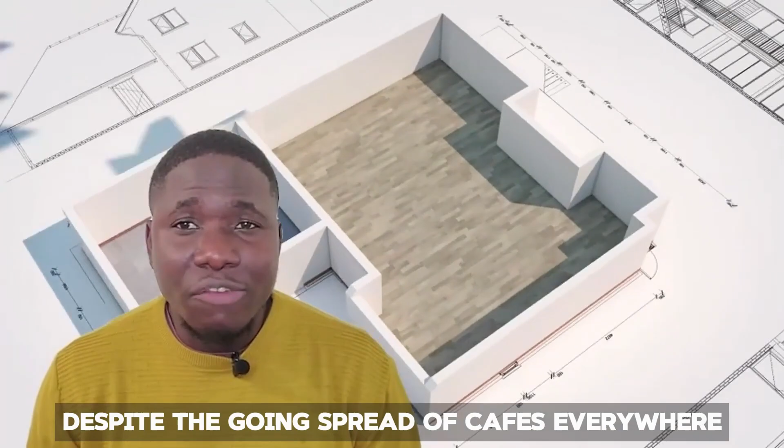This number includes both small independent cafes and large chains like Starbucks, with over 34,000 locations in 84 countries as of 2023. Despite the growing spread of cafes everywhere, designing and building one is probably one of the most mentally challenging endeavors anyone can undertake today.

In this video, I'll be uncovering the secrets of a hidden sweet cafe gem in Chiang Mai, Thailand, called Mitbury the Public House. From our findings, this project was envisioned to help customers enjoy the natural surroundings as they consume their light meals and drinks. But what many people don't know are the special characteristics of this building that make it a place you want to be. This isn't just a cafe, it's a story of innovation, preservation, and the romance between architecture and nature.

Located between the Mae Rim-Samoeng Road and the Mae Sa River, this project started out as a vision to create a sanctuary where nature reigns supreme and architecture serves as its humble companion. When WOS Architects Estudio first stepped onto this site, they were greeted by a low-lying valley, a canvas of natural beauty, untouched and pure. Their mission was clear but daunting.

Their mission was to craft a space that would invite visitors and customers to connect deeply with nature without disturbing its natural balance. Just hold on a sec. Does this mean that most buildings can be erected without destroying already existing nature? This project will answer that question in a jiffy.

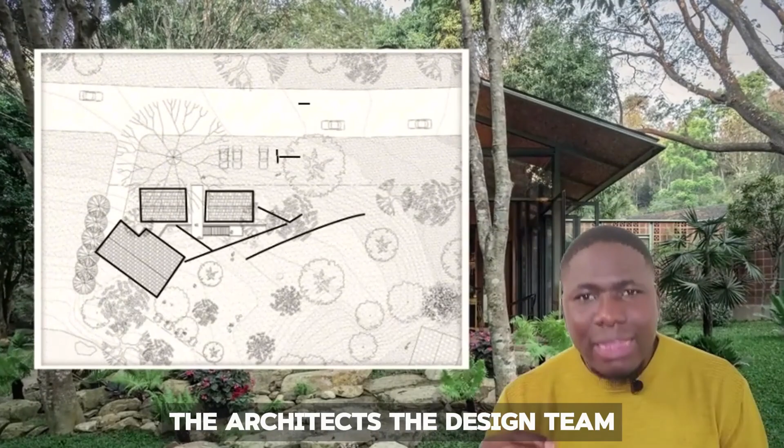As if that was not enough, the design team did something else on this project. Draw closer, I want to tell you exactly what they did next: the positioning of the buildings in this project. The architects decided to place the structure near the roadside embankment.

But there's a twist here. This wasn't just any placement. It was strategic, leaving enough gaps to nurture the already existing trees. From the road, a bridge or a walkover beckons, guiding you towards an unknown destination, and making you wonder what truly lies ahead.

When you walk on this bridge, and at the end of it, there is a revelation: a long staircase that descends into a hidden garden. This isn't just any garden. It's a secret world, a grand hall of nature surrounded by streams, boulders, and towering trees.

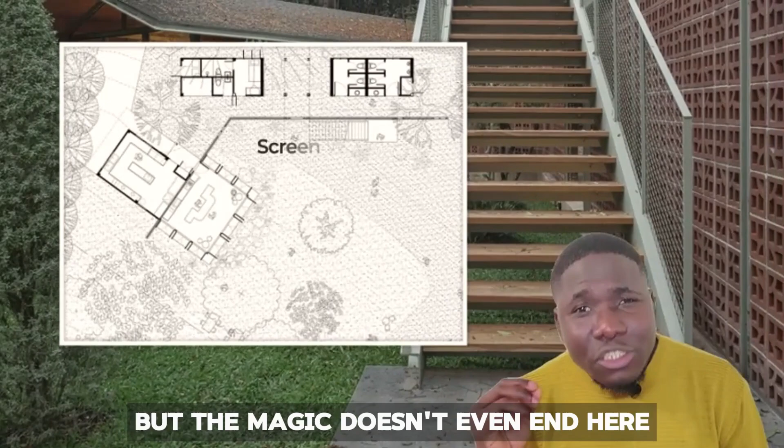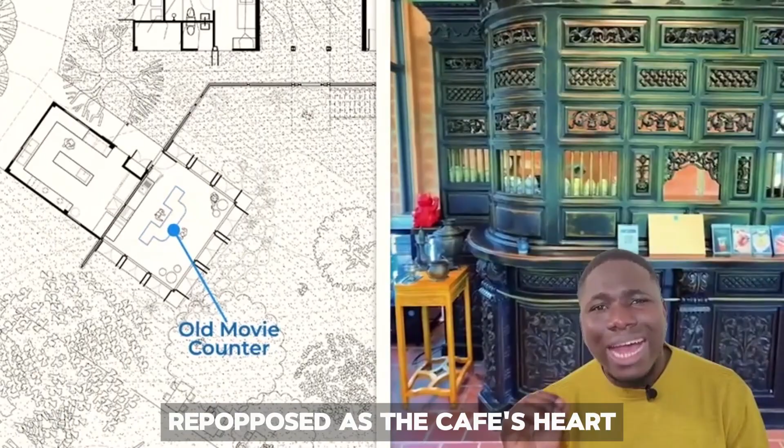But the magic doesn't even end here. The screen wall conceals more than just functional spaces. Integrated within are antique treasures, archways, windows, even an old movie ticket counter repurposed as the cafe's heart. It's a bridge between eras, and as a matter of fact, a conversation between the past and the present.

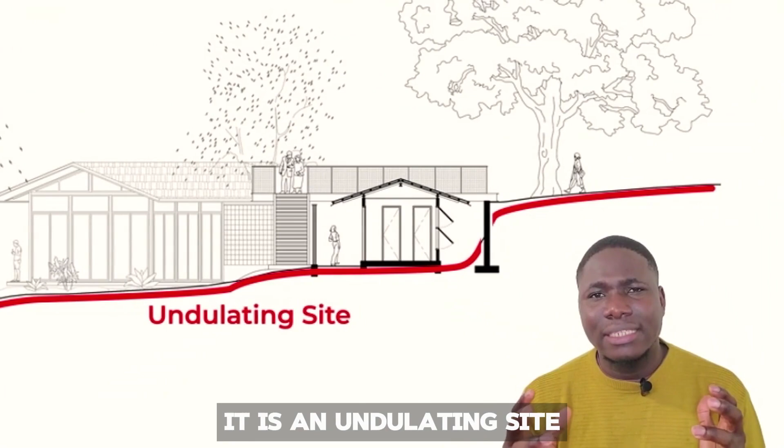The floor plan design. Now let's go over how this project was planned, looking at the information at our disposal. What do you easily notice about the location of this cafe? Contrary to what you might think, it is an undulating site with a retaining wall just at the end of the roadway. Typically, retaining walls are used for holding and retaining the soil from the road, to prevent things like soil erosion.

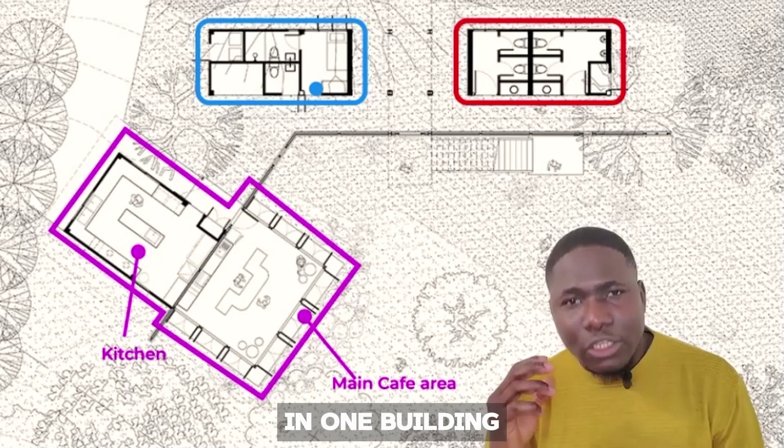Three single-story buildings form the core of Mitbury: the main cafe area and kitchen in one building, the storage and staff quarters in another building, and the restrooms in the last building. Each of them has a gently pitched gable roof for easy and gradual rainwater fall-off.

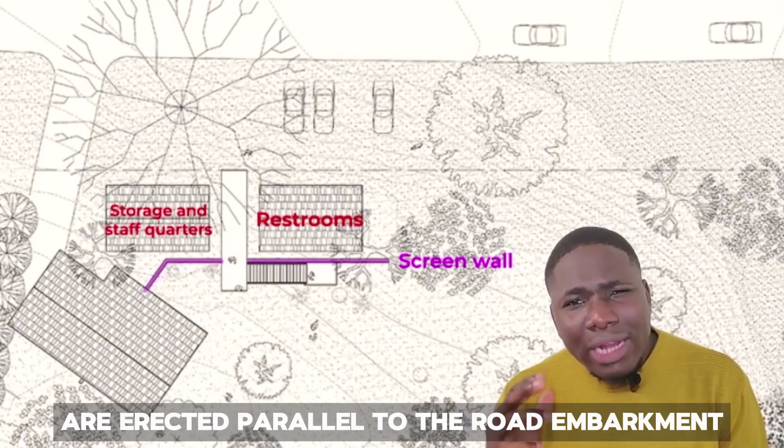Now I'm going to show you something even nicer. The storage and staff quarters, the washroom, and the screen wall are erected parallel to the road embankment. The walkway that leads to the stairs flows from the roadway and is cantilevered at the top of the screen wall at 90 degrees.

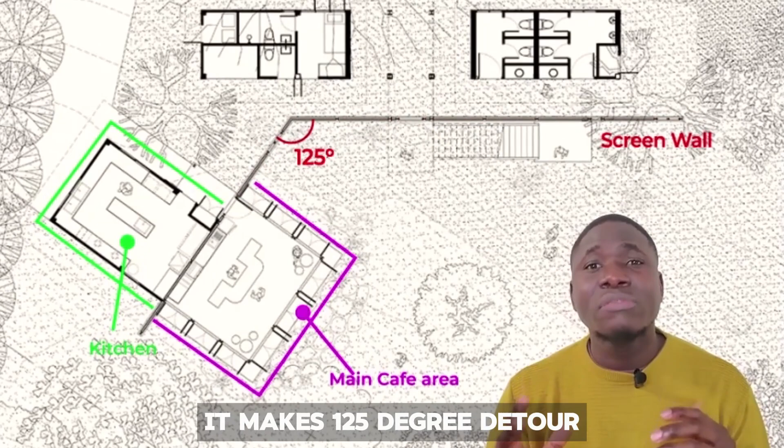Another thing to observe here is that as the screen wall approaches the kitchen and service area, it makes a 125-degree detour, as if taking you to a new destination, which is the main cafe area where you go to enjoy yourself.

Before I go on, I want to reveal something you haven't noticed yet. I think the designers would deem it necessary that you know, and I would never hide it from you. Now, look critically.

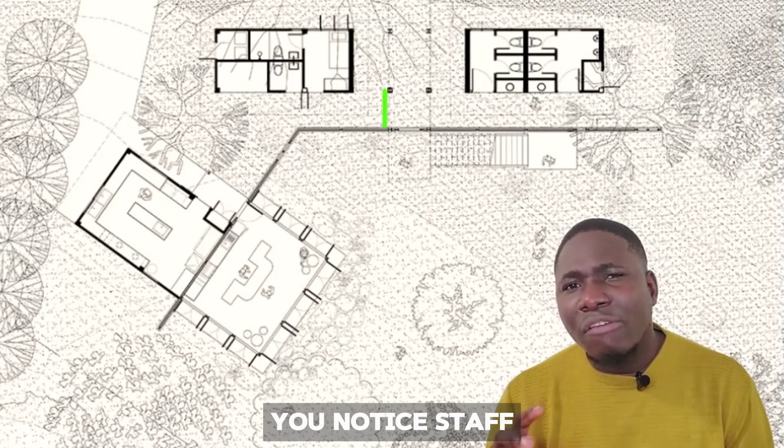You will notice staff and visitor demarcations established in this project, as if to help customers or visitors know where they are permitted to access and the forbidden areas they are not permitted to enter. These would also guide your movement on this site if you ever visit.

The landscape just opposite the cafe and restrooms are wide open for anybody's outdoor use, for your outdoor use, for whosoever. We all know that the main purpose of any bridge built is to give you passage, to help you access places that are otherwise difficult to access.

And if you look critically at the bridge on this site, what do you notice? Before it gives you access to the cafe and the site in general, it gives you the option of stopping to ponder on the wonders your eyes can see before nudging you to descend into nature's beauty using the staircase.

You might decide to turn back despite what your eyes see, but I will argue that you wouldn't realize when you reach the bottom of the staircase to explore the allure of your eyes. Yeah, it is that powerful.

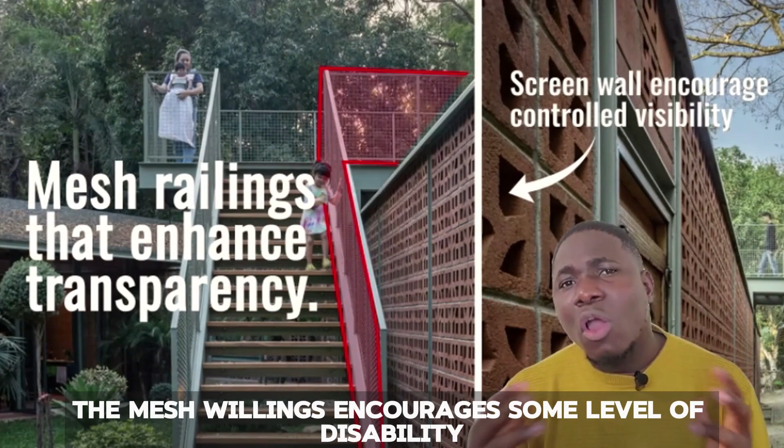The connected staircase features mesh railings that carry you into the beautiful scenery. Hardly are any of the elements of this project opaque. Like the screen wall, the mesh railings encourage some level of visibility, transparency, and curiosity that moves you towards the journey of exploring the site.

As you walk into the cafe where the screen wall ends its journey, brown terracotta tiles and the soft glow of a chandelier welcome you.

The antique ticket counter, dark and mysterious, invites you to place an order. Clear glass walls open to the garden, blending the indoors with the outdoors.

The garden itself, a masterpiece, features stones that were unearthed during construction, now repurposed as steps. Each stone, each plant from the garden adds to the atmosphere, creating a living, breathing paradise.

I've talked a lot about the beautiful things regarding this project. However, in my opinion, there are a thing or two that I did not like in this project. Allow me to express my displeasure. I'll give you 5 seconds to guess what it is before I tell you. I'm sure you weren't able to guess, but here it is, I'm going to let you know.

I didn't like the overall idea behind the toilet or washroom design. I believe that public hygiene needs to be considered much more in a place where we come to eat and drink. You don't want visitors getting down because of food contamination.

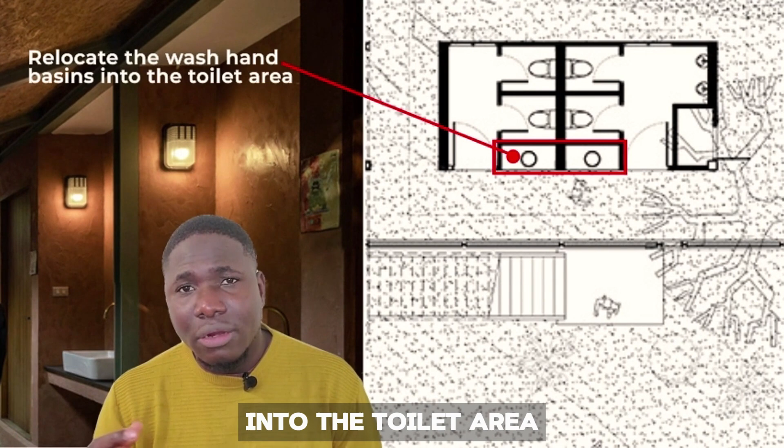Here's how I would redesign this toilet if I were to work on it. I would move the wash hand basins into the toilet area and have the main door handle equipped with hand sanitizers.

The designers might argue that they want people to have the option of using the wash hand basins without going into the toilet area. In that case, I will advise that another wash hand basin be located somewhere else on the site, closer to the cafe.

Another critical thing that I observed in this project is that the cafe doesn't seem to be disabled people friendly. The toilet, the stairway, etc. doesn't show that this cafe was erected with disabled people in mind.

Now, this might be due to the nature of the site, client's desire, project budget, or some other information that isn't at our disposal. I hereby make a solemn disclaimer concerning my opinion for the toilet and disabled people's design. The information I have expressed here is based on the information I have access to, which might be different from what is obtainable right now on the site.

Nevertheless, you would agree with me that WOS Architects and Estudio has done a marvelous job. I think the most remarkable thing that these designers did was to make this site a place completely worthy of exploration. Only after that was achieved did they attach the cafe to help people have a stomach feel.